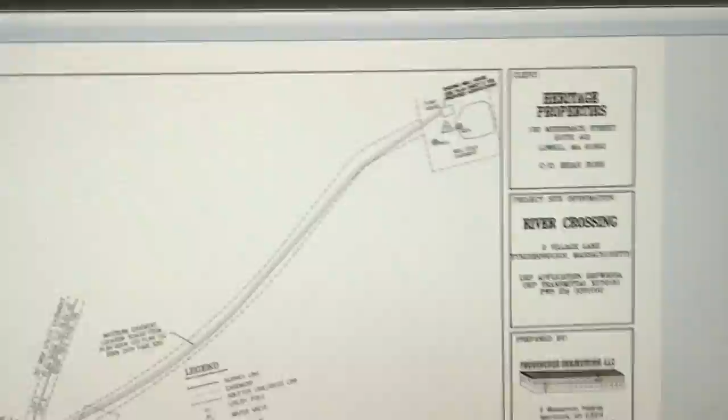Here's a project called River Crossing. It's in Tyngsboro, Mass. There's a couple of wells that pump into a well house at the bottom of a hill down by a river.

The water flows up the hill, through a roadway, and into this little booster pit. That's got a couple booster pumps in there as well that boost the pressure, and it pumps the drinking water out into four apartment buildings. So there are lines that feed each apartment building.

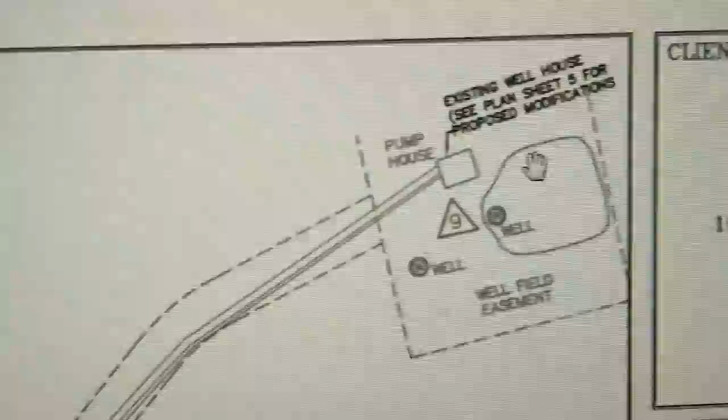So part of the problem is that this is such a remote location, it's very difficult to get to, and they have to lug jugs of potassium hydroxide for treatment down here, and the system is very tiny and dilapidated, and it's in need of an upgrade.

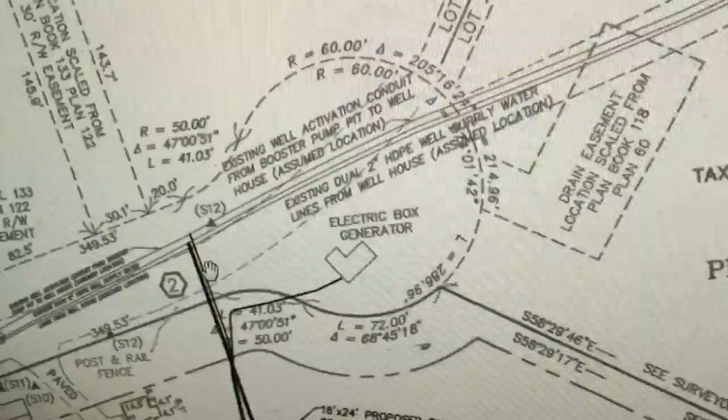So our plan is to remove all the treatment in this little well house, and the water is still going to flow through these two lines, and what we're going to do is connect one new line into these two existing lines, bring that into this building. The water is going to come out of the building, go into this storage tank.

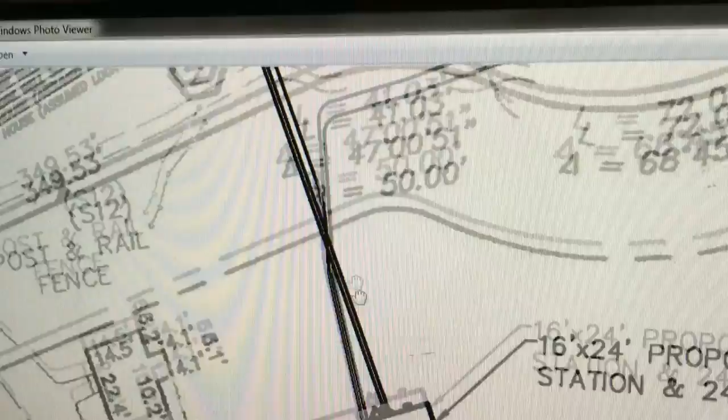Then there's a line that comes out of the storage tank, and there are two pumps in here that are going to pump the water back into the building and out the second line and back into the two original lines and continue to feed the rest of the development.

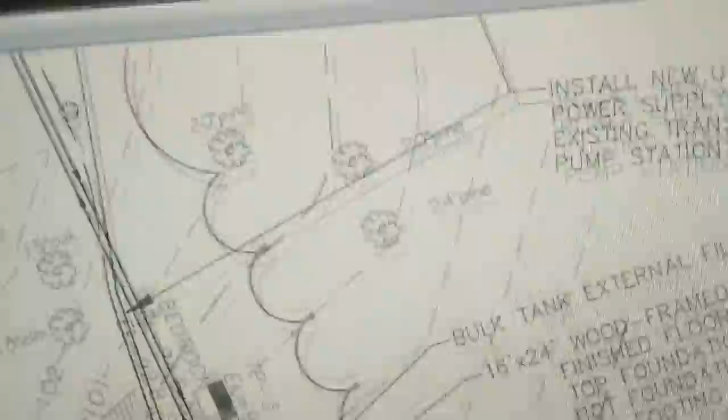So what we're looking at here is a little bit of a blow up of the location where we're going to make the connection to those lines. So we're going to tie into these two lines, run a new underground line into this pump station building. This is a 16 by 24 building with a 24 by 24 garage next to it.

Inside this building, the water is going to be treated, and the water is going to flow out into the storage tank, and like I said, out of these two booster pumps and back into this building. And then once the water comes out of this building, the new line will connect back into these two original lines and go off and feed the rest of the development.

This is a schematic of the pump station building. You got the 24 dimension this way, 16 feet this way. The garage is on this side. We got a couple of doors that are going to allow access here.

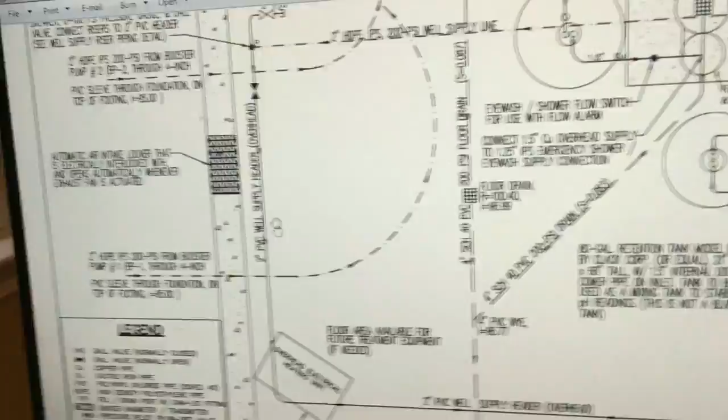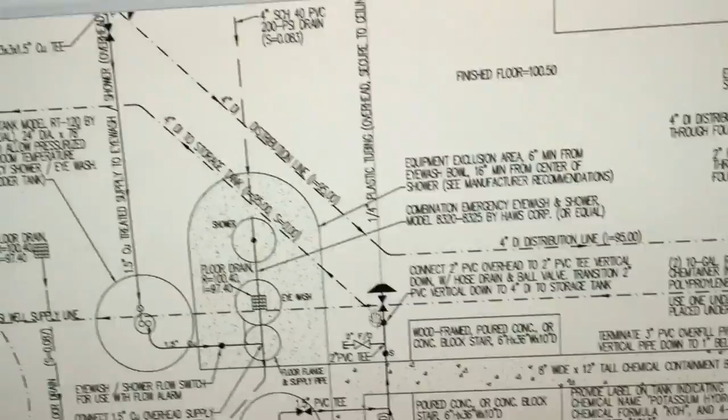And what we have is the water supply line is going to come in from the street, from those two lines that we connected to. It's going to come up through the floor and come around the side here. We're going to inject potassium hydroxide, that's KOH, and the water is going to go through this contact tank for mixing, and then down through the floor and basically out under the floor and over into the storage tank.

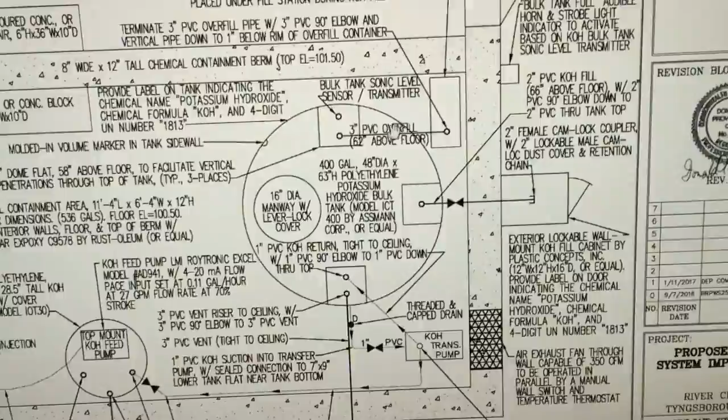Now what we have here is a bulk potassium hydroxide tank, and this is a very caustic chemical, so we built a little 12-inch tall concrete berm on the floor in case any of this chemical spills. It's going to be contained in the concrete containment area. We have an outside fill port on the outside of the wall with a little locking door so the truck can come and fill up this potassium hydroxide tank.

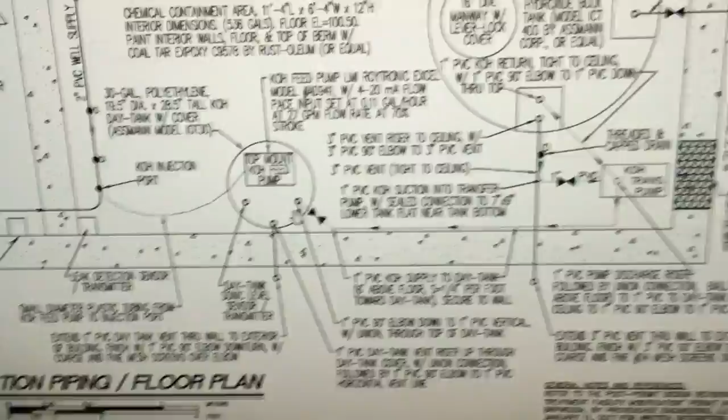Then we got a pipe that comes out of the bottom of that tank that goes into a transfer pump. It's activated by a manual switch that transfers the potassium hydroxide into this day tank. It's a potassium hydroxide day tank. On top of that day tank, there's a little chemical feed pump that pumps the potassium hydroxide into this copper piping, which mixes it with the drinking water.

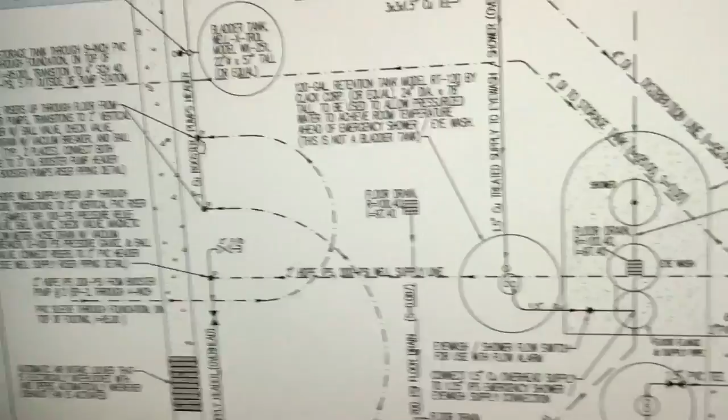So after the water comes out of the tank, there are two booster pumps that draw the water from the storage tank, and those lines come in here and here, and they come up through the floor. They connect together, go through a flow meter, and basically punch back down through the floor, go underground out here, and back out to connect into the rest of the distribution system.

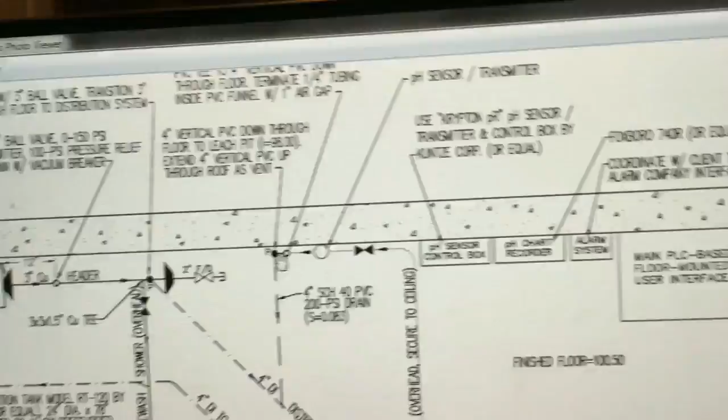Now the treated water has a branch that comes off of it, and a small amount of water runs through what they call a pH analyzer, and that's continuously monitoring the pH of the water. So that flow has to continuously let water flow through to monitor the pH. So in order to dispose of that water, there's a pipe that goes down through the floor and goes outside.

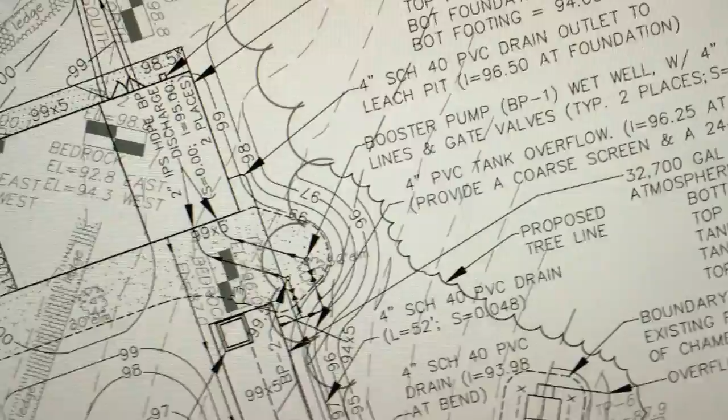It also collects some floor drains in here, and it goes out through the wall and goes over to an outside leach pit. So that drain line is shown on this plan, comes out of the pump station, then it comes down and flows along here and goes into these 8 underground plastic leaching chambers. This is a leach pit that disposes of that water. We've oversized this a little bit bigger in case we ever needed to put treatment, so we could actually put backwash water in here if necessary.

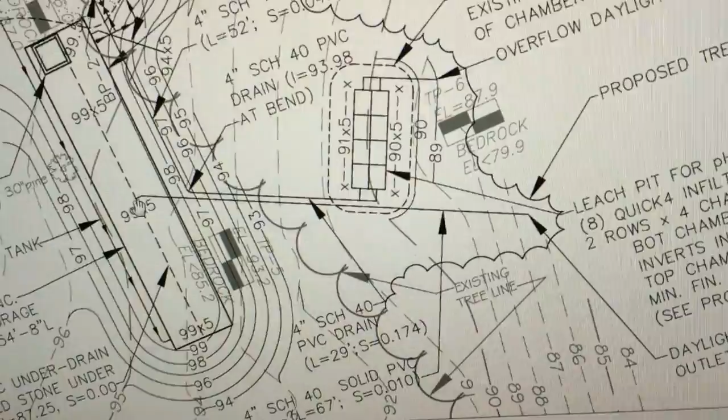The other thing under here is this dash line is a perforated pipe underneath the storage tank, and that has a connection to a solid pipe that daylights down the bottom of the hill, so any groundwater that tries to come up below the storage tank gets captured in this pipe and relieved in here. If you don't relieve groundwater, it's actually possible that this big concrete tank could even float if it was ever drawn down when it's close to being empty.

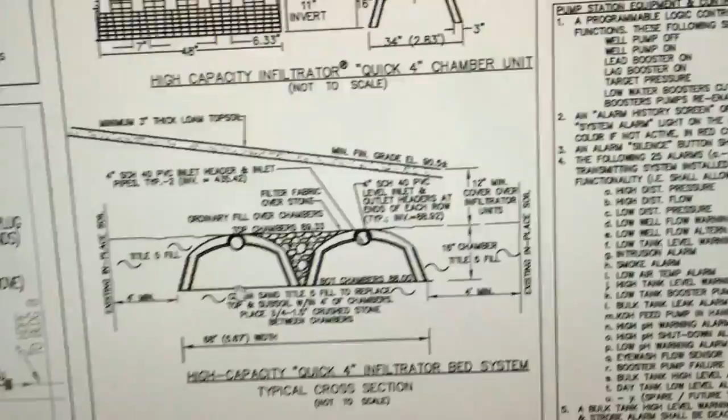This detail shows what the plastic chambers look like. They're basically 3 feet wide, so 2 of them together are about 6 feet wide, and they're 6 feet long, so 4 of them is 24 feet. They're plastic and they've got louvers on the side that allow the water to drain out.

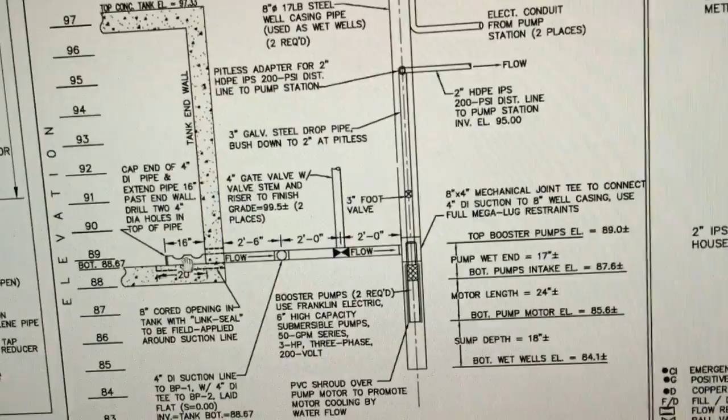Another detail that's important to look at is this is the edge of the storage tank. We have a pipe that comes out the bottom. It's got a couple of holes on the top so the water seeps into the top of the pipe. The water level in the storage tank is usually up high, only a foot or 2 down from the ceiling. So water is always flooded in this suction line here.

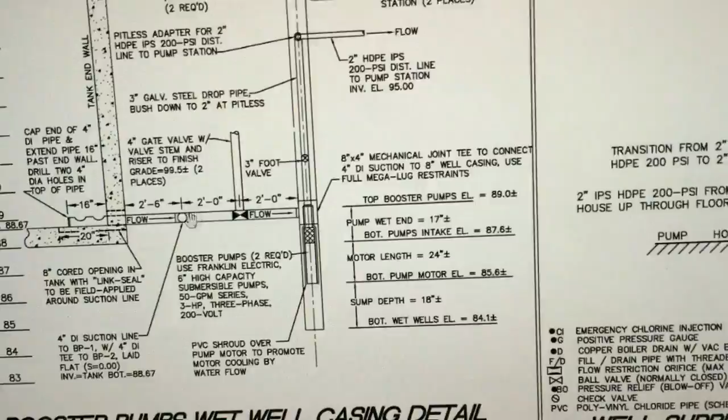Then we have basically what looks like from the surface are just 2 wells with well caps, but they're actually not wells. They have a cover on the bottom of the pipe, so the water flows out of here, goes into the screen of a submersible pump, and those submersible pumps, there's 2 of them, pump the water out through here, and these are the 2 lines that go back into the pump station.

This is a detail of an underground concrete storage tank. It's about 54 feet 8 inches long, and the cross section is 10 feet wide by 8 feet tall on the interior. There's an access way to allow access into here with a ladder. We've got an overflow pipe in case the tank ever fills up too high. We've got underground lines. That's the underground line that goes to the suction pumps that I just showed you.

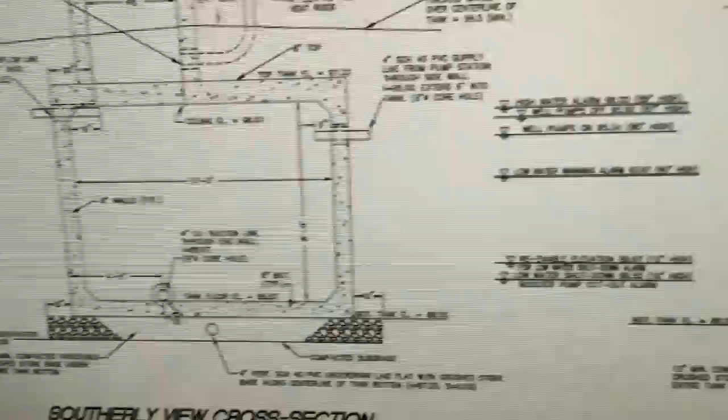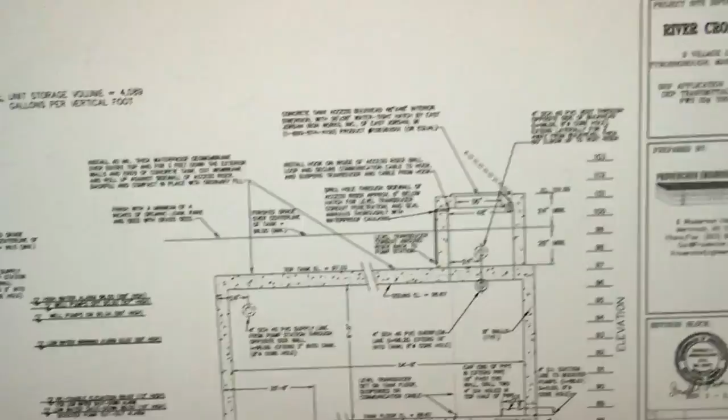We've got a vent to allow air to escape and replenish when the tank level goes up and down. And this is the fill line that comes in through the sidewall from the pump station. And again, you can see the crushed stone base, and there's an underdrain in here, and that's what alleviates the groundwater. It's got an access hatch on top that doesn't allow any kind of penetration of any bugs or rodents or anything like that.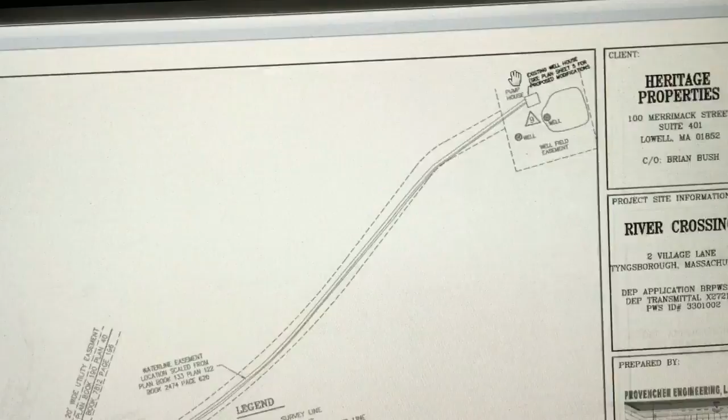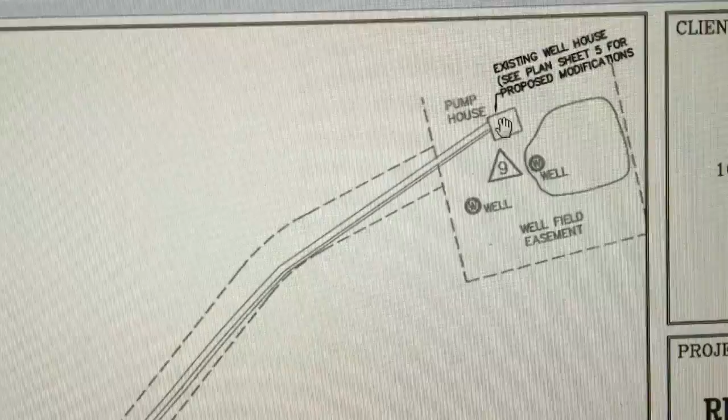So again, looking at the overall site, what this allows us to do is to eliminate all the treatment down here at the bottom of the hill in this well house, which didn't even have an access road to get to. So the operator had to lug jugs of this potassium hydroxide down there. So now that treatment's all gone from there, and the raw water, like I said before, gets pumped up through these 2 lines. And now we treat the water in the pump station here, store the treated water in the storage tank, and repump the treated water through the pump station again and through these 2 lines.

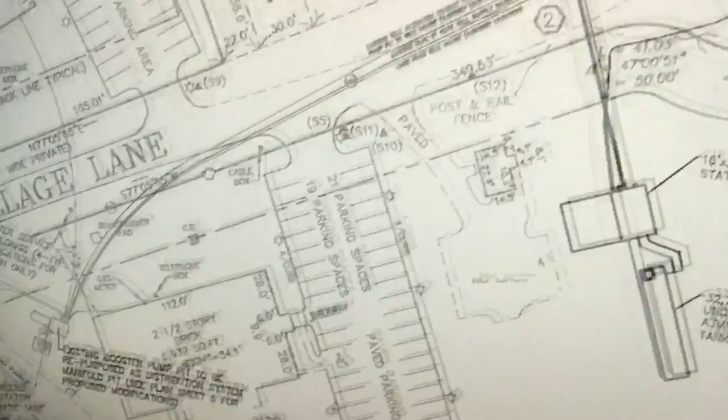And now we're able to get rid of the booster pumps, because these pumps in the wet wells now provide enough pressure that we can get rid of the booster pumps in here. So what this also allows us to do is we always have 30,000 gallons of treated stored water on hand. So if something happens to one of the well pumps over here, we don't have to worry about running out of water right away. We have time to react to fix the well pumps.

We always have these 2 booster pumps online, and there are 2 of them in case one of those fails. This is the second one that's operational. So we have stored water, and we have constant pressure being provided to all of these buildings. So the rest of the videos are going to show you the construction.